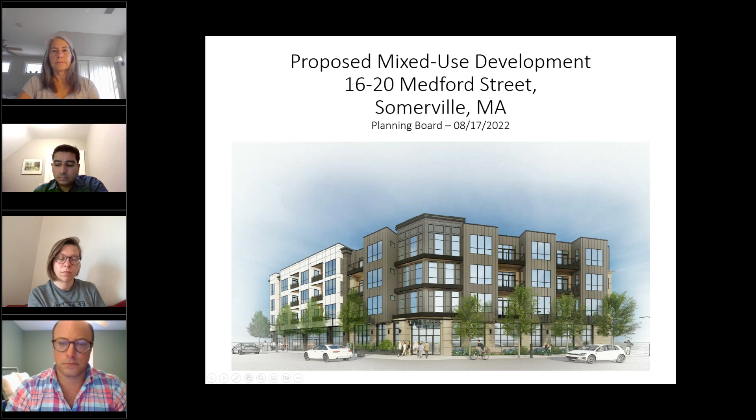Just a reminder of the project team, which you're all pretty familiar with at this time. DiBiase Homes as the owner, Nick Zazula from MQM as the legal counsel, and Khalsa Design as the architect. We also have GM2 as the traffic civil engineer, and Verdant as the landscape architect.

And our development timeline, we were here just two weeks ago for our second planning board meeting. And prior to that, we went through the whole process with the UDC and neighborhood meetings for a little over a year now.

And a quick recap of our site. So we are at the site indicated here at the corner of Medford and South Street. We also front on Bedford and Warren Street. Medford was our pedestrian street where we've located our commercial, and the remainder of the project would be 41 residential units.

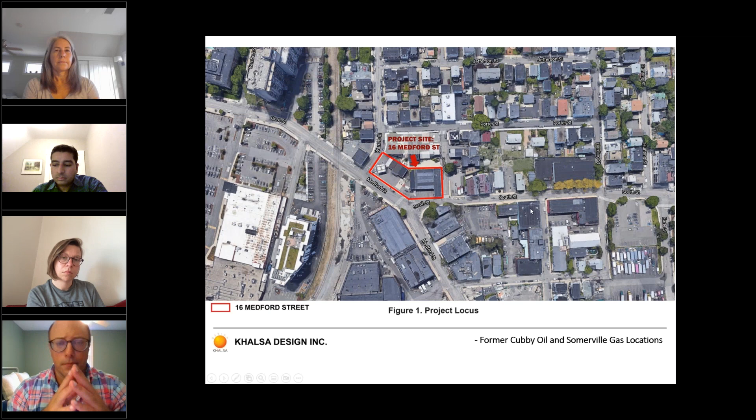And our proposed aerial view, so you can kind of see before and after, the massing of our building. And what we heard last time is you wanted to see kind of enhancement of the rear facade design, because there is some visibility from Warren and Bedford. We've provided some additional views, which can really give a picture of how much you'll see, along with enhancing the detailing on the facade.

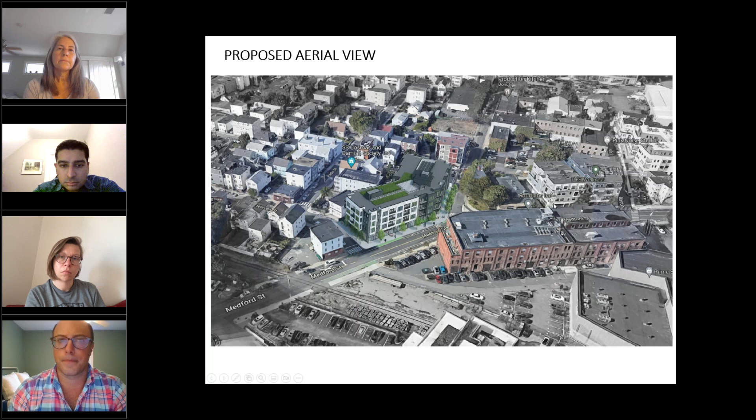So here was our previous rendition of the rear facade. We had kind of more of a simple look with just gray panels with some balconies in between for the entire length.

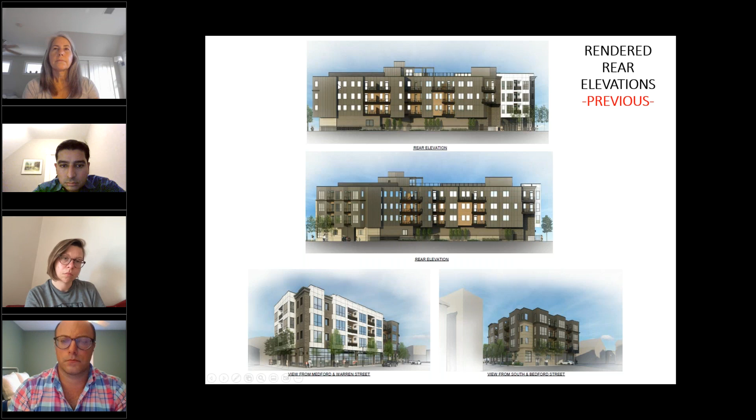And our proposal today, which we revised, is showing the treatment that we used on the Medford and Warren Street side, which had the white paneling bays carried around for that entire side of the rear till you get to kind of the pinch point. And with that, we believe it is a more cohesive look to the building.

We've also changed the window pattern to give more interest to that facade versus just having a bunch of double windows. We've spaced them, given some trim work around them. We've incorporated some additional cedar siding areas to warm up the space.

This slide shows our revised rendering. The top view hasn't changed, that's the corner of Medford and Warren, but we've added these two additional views to give some context. So this top right one would be if you're on Warren looking towards Medford Street. So there's a two-story existing house here.

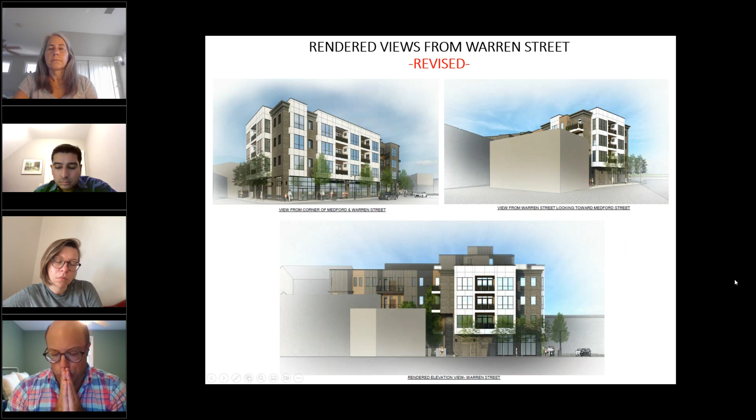And from Bedford Street, we did the same thing. So the same treatment would be carried around that side. You can see in these bottom two views are perspective views of what you'll see. The adjacent house is a 2.5 story, and there is a double wide driveway, so you will see a good portion of that facade. We have, just like I said, carried the same treatment from the front around to that side and broken up with further cedar siding.

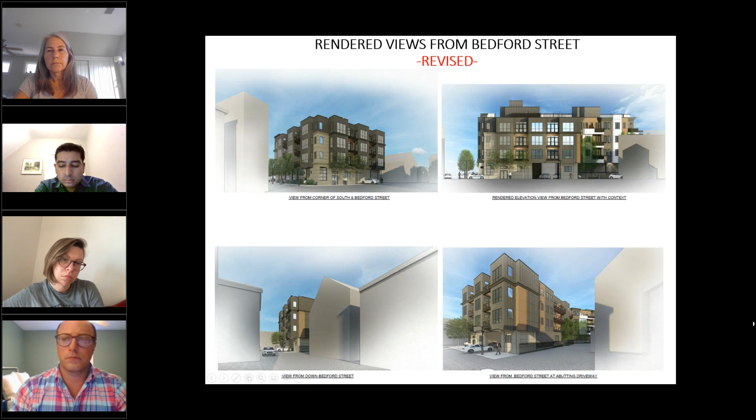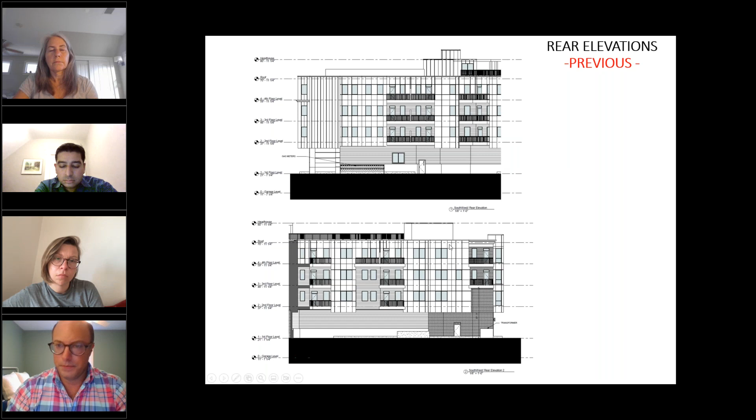And just the line work drawings showing the before, which is the panels and different window spacings, that got a little bit plain for the back. And then we've dressed it up with, especially this bottom one, you can see where we carried the Medford Street treatment around with the white panels, the balconies, and then spacing the windows differently as well.

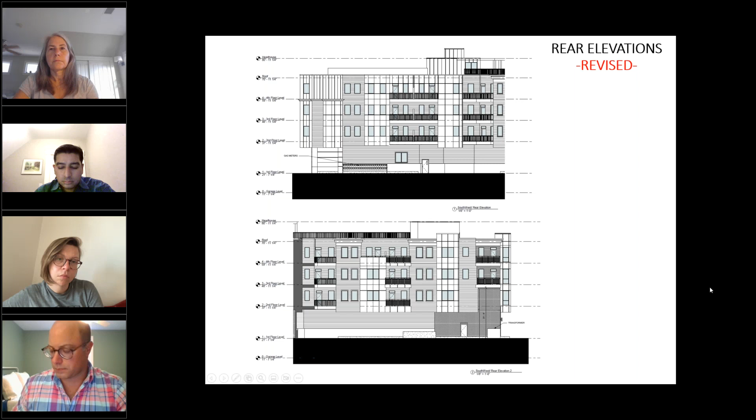The gist of all those discussions over the past months was that burying the overhead wires along the street frontage was infeasible for a few different reasons, mainly cost. It was estimated at a couple million dollars for the block of wires. We also discussed with the director of engineering, who basically said they don't have much experience with this amount of burying overhead lines.

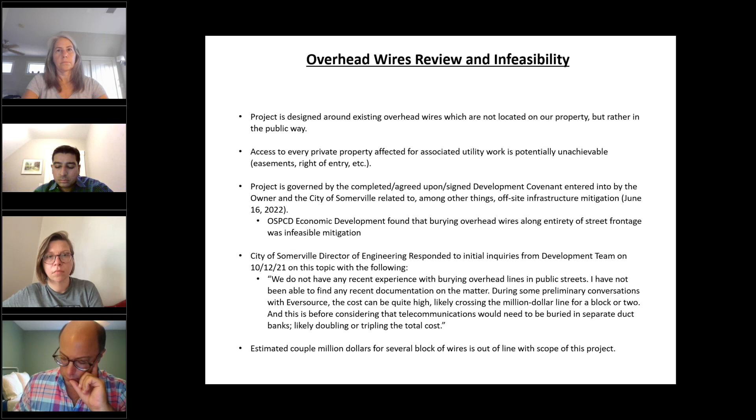This came up from the neighborhood and in discussions with Councilor J.T. Scott, our city councilor. At the end of the day, it's just not something we're able to do for feasibility reasons—not only economically, but also from a time and coordination perspective.

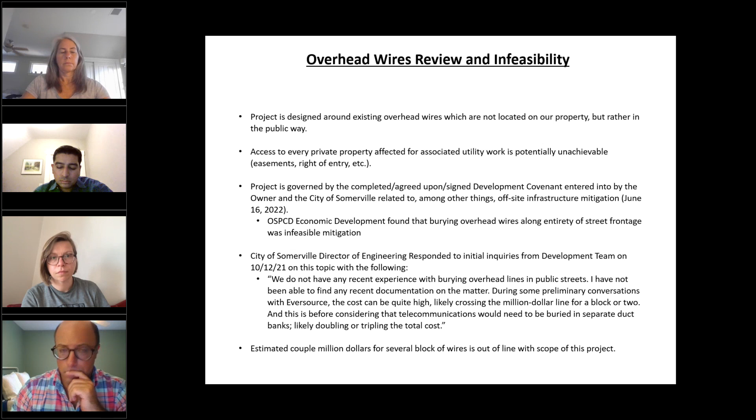Happy to go over this in more detail and answer any specific questions, but we wanted to make sure we addressed the question since it came up throughout the process. We looked into it extensively, with discussions with the city and Eversource. Those were the two main points we wanted to hit, but we're happy to go into more detail on any of those or any other questions you may have.

Thank you very much. I'm going to reserve my comments until I hear from my colleagues. This is not new information as it pertains to reopening public testimony, so we won't be reopening public testimony, but we will continue the discussion between the planning board and the applicant and staff. I would appreciate hearing from my colleagues.

I have a few comments, but I'd like to hear what folks say. My concerns were not absolutely critical to the building, but I do respect that you have made steps to address the concerns I raised that were aesthetic.

Yes, Aaron, please. Thank you, Mr. Chair. I'm going to respond to the power line bit — I really appreciate the applicant's diligence in looking into that and studying the feasibility, just trying to make it happen to the best of your ability. I also appreciate that the utilities for this building will be buried, and that should conditions in the future change regarding right of way, easements, and those externalities in city or Eversource control, it doesn't limit the feasibility of burying power lines in more densely occupied areas. So I appreciate the detail and the challenges here, and thank you for reporting back on what you've done. I don't have concerns there, but I appreciate the applicant's efforts.

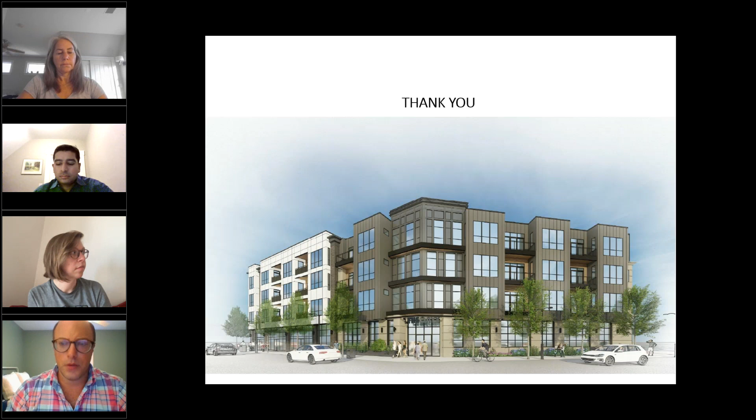The concerns that were raised by this board and by me were that the original design really didn't respect the rear of the building, particularly because we had people that would be looking at it. I think what you've done, if we look at the bottom rendering, really does add some distinction to different parts of the building.

I think it shows some variety of material, some variety of where the windows are and where the trees show up. I think it really does reflect an attempt by the applicant to respond to the concerns we raised in the last meeting. And I think this is a huge step in the direction we're looking to see in the revised rendering of what this side of the building would look like.

So I appreciate the work that you did, both to address Aaron's questions on electrical, but also on the concern I raised on the side of the building. So I'm pretty satisfied with what you've presented with us tonight. I don't know if anybody else has any comments they'd like to raise before we move to the next stage of taking a vote on this application.

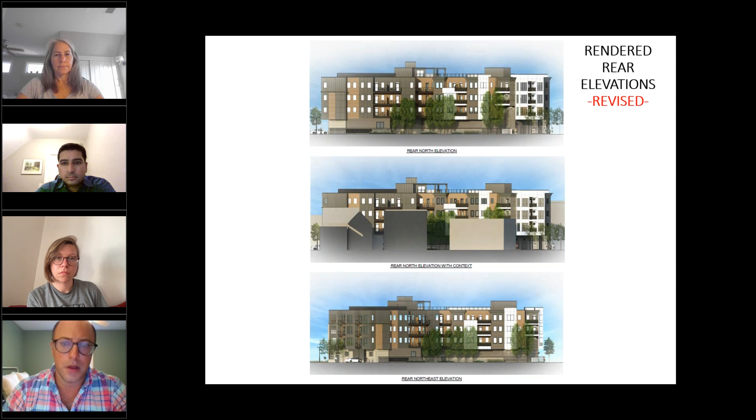Following public testimony, review of the submitted materials and deliberation of the required considerations outlined by the zoning ordinance, I move to approve with the conditions laid out in the staff memorandum the site plan approval to develop a 4-story LEED Platinum general building in the mid-rise 4 zoning district, seconded by Aaron.

Chair votes aye. Jahan votes aye. Aaron votes aye. Debbie votes aye.

And following public testimony, review of the submitted materials and deliberation of the required considerations outlined by the ordinance, I move to approve of the conditions outlined in the staff memorandum, the special permit for a household living principal use for 41 dwelling units, seconded by Jahan.

Chair votes aye. Jahan votes aye. Aaron votes aye. Debbie votes aye.

Wonderful. We have a unanimous vote on both of the required votes by the planning board. Congratulations to the applicant and good luck.

Thank you very, very much. Have a great night. Thank you. Thank you, you as well.

What I'd like to do now is open up the applicant for 231 to 249 Elm Street and 6 to 8 and number 12 Grove Street, all of which are one application.

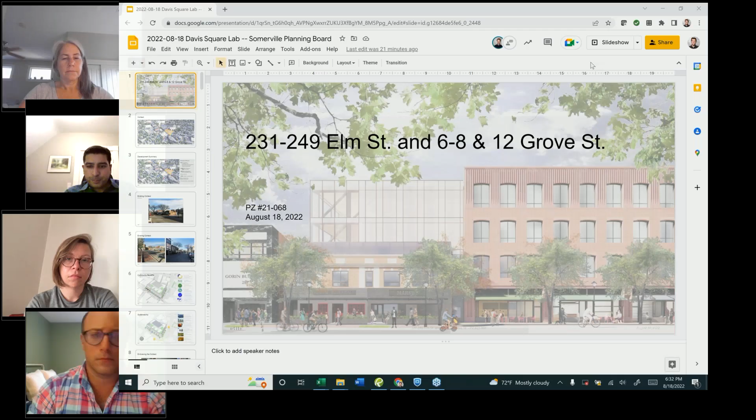Great, thank you very much, Risa, and thank you very much to the planning board for inviting us back this evening. We're very grateful for the opportunity to have a discussion two weeks ago, and we look forward to continuing that discussion this evening. What I was going to do was ask Brett to give a high-level refresher overview of the project. We certainly could go through more detail if it would be helpful for the board, but we'll take your direction on that, and we have all of the detail on hand to the extent it's helpful over the course of the discussion.

All right, good evening. Thanks, Andrew. Thank you to the board for your time tonight. My name is Brett Bentson, I'm a principal at Utile. We're a Boston-based architecture and urban design firm with offices on Kingston Street in downtown Boston. Thank you all for your time tonight.

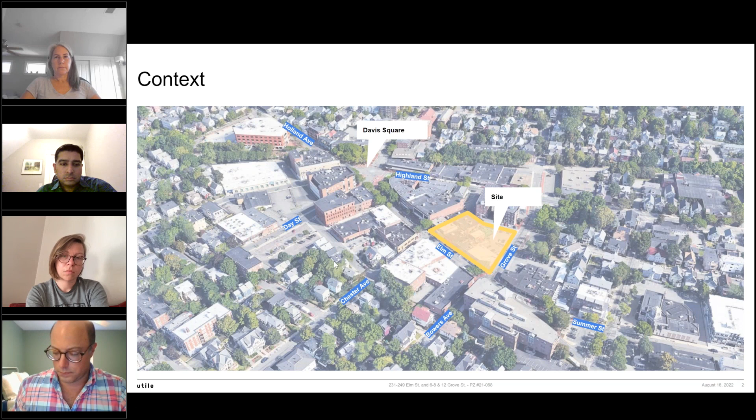So just as a quick review, and then I'm going to pause: the building is 4 stories tall with ground floor retail and lab or office space on the upper floors. It's approximately 128,000 square feet in all. It includes public underground car parking and bike parking for tenants and the public. The project will be LEED Platinum certifiable and is fully zoning compliant, including the mechanical penthouse and small scale retail amendments. So I will pause right there, Mr. Chair, and you can let me know if you want me to go through the rest of the presentation or if it'd be better to be respectful of your time to pause and hear any comments you have.

Because we did have a pretty fulsome presentation at our last meeting, and we had public testimony presented orally, and we also left the written comment period open until last Friday, I'm not certain that any further presentation, unless something has changed, needs to continue for the refreshment of the recollection of the members of the board. Unless something has changed, it's my understanding that we're not being provided new information, so this isn't going to reopen public testimony. I do want to let the board know, and Risa can correct me if my information is outdated as of a few hours ago, that there was supposed to be, or there is in process, a covenant with the city that I do not believe has yet been executed.

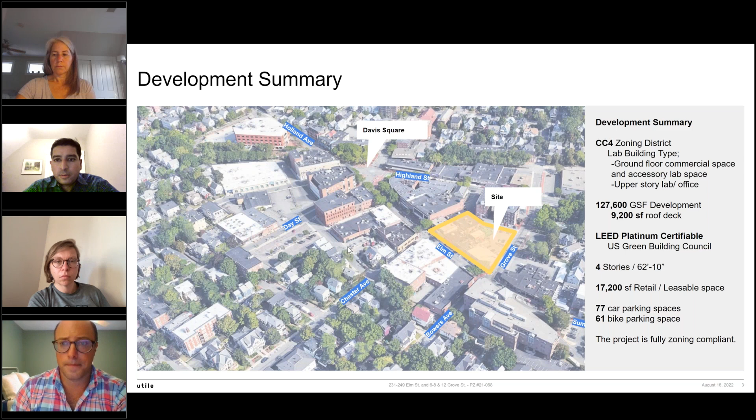This is Brett Bentson from UTL. I'm going to scroll quickly through the presentation to get to the ground floor plan so I can address the question about pedestrian and bicycle activation on Grove Street.

I know Brett will give a more eloquent answer, but I'll say, John, it's great you brought the point up. It's something we've endeavored to balance carefully - the activation but not overactivation of Grove Street. As we worked through this process, the feedback was that the Elm Street frontage should be vibrant and active with the retailers we discussed. But as you turn the corner, there's an opportunity to enhance the condition along Grove Street versus its existing conditions, but not overdo it as you get closer to the residential node on that back side. So it's something we've endeavored to make enhanced and activated, but not overactivated. Brett can walk through the details, but we're always open-minded on enhancements.

Yeah, that puts it well. We've heard consistently in public meetings that neighbors didn't want it overactivated on Grove Street in terms of the uses on the ground floor - looking for something a bit quieter. In terms of the sidewalk and public realm, though, we think it's one of the greatest transformations for the project. The current Grove Street is in pretty bad disrepair, not a great place to experience - there's a surface parking lot behind the existing buildings and the sidewalks are in disrepair. In this plan, we've set the building back 9 feet from the property line, resulting in an almost 16-foot wide sidewalk along Grove Street, with permeable pavers along the street edge, new street trees, bicycle parking, an ample accessible walkway along the building, and potential street furniture and planters to make that public realm feel inviting and neighborhood friendly. I hope that answers your question.

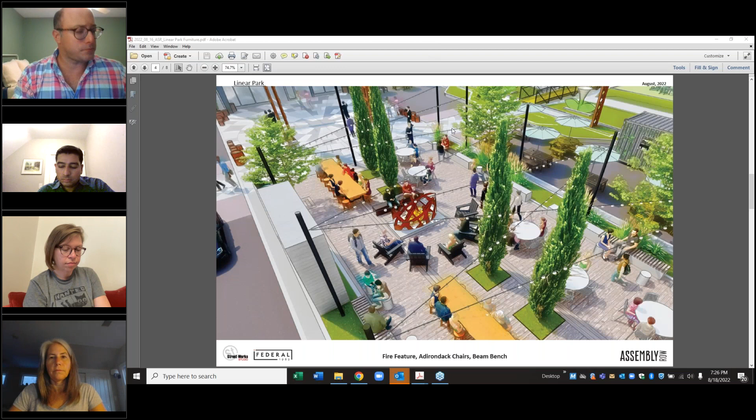So can you all see the rendering? Can you hear me? Yes, we can see you and hear you. You can see the rendering? Yes we can. Okay, thank you very much, Mr. Chairman and members of the board, and thank you for having us tonight. We are always trying to figure out how to improve things at Assembly Row. As part of that, we are trying to figure out how to make this linear park area between the smoke shop, barbecue shop, and Cafe Nero more inviting, more accessible for more people.

We initially started with a pair of bocce courts here when this first opened about 5 years ago, and frankly, they've been underutilized and not that successful. They're not regulation-sized courts, they don't get much use, and we would really like to do something to make this space more inviting and welcoming for more people.

So our thought is to replace the bocce courts with a public fire feature and really increase the amount of furnishings, different types of seating options available to people here. We thought the fire feature is something that could really be used year round. Right now, the bocce courts get covered up in the winter, and the space just isn't as active as we'd like it to be. So the proposed fire feature is right here in the center of the rendering. The area where the bocce courts are today is outlined in a rectangular frame in the decking underneath these columnar trees and the fire feature.

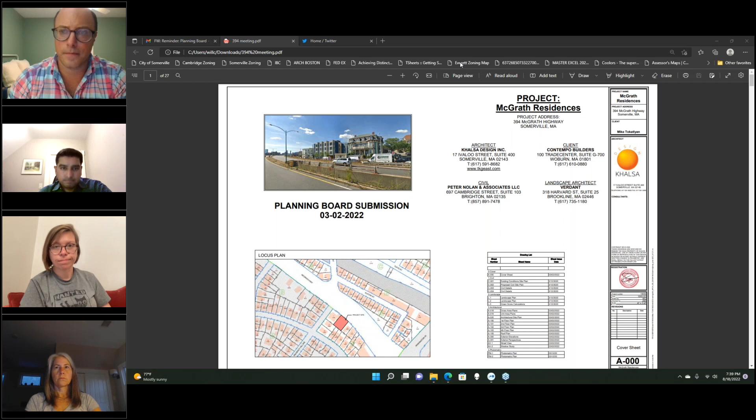Thank you, Ann. Can everyone hear me? Because I have a new web. Okay, great. Thank you. Good evening. Good evening, Will Chalfant from Khalsa Design. Nice to see all of you again.

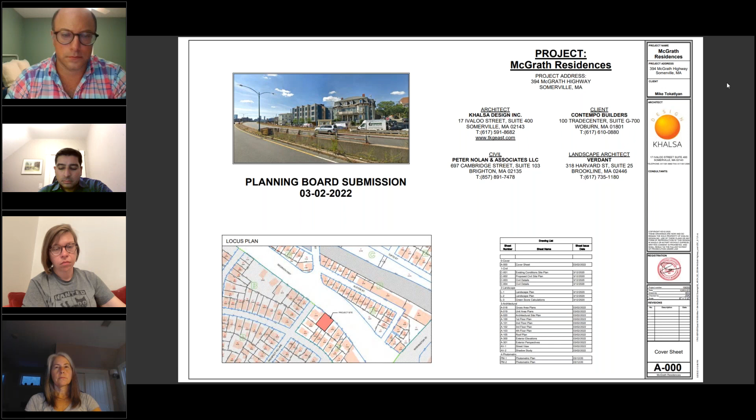As Ann mentioned, this is a proposed multifamily residential project on McGrath. We're kind of at the base of, halfway up and at the same time at the base of Prospect Hill, so it's a unique situation. This is currently the Excel Mechanical site. The building is literally built into the earth almost here. It takes up basically the entire site, so there's not a lot of breathing room from that road right now.

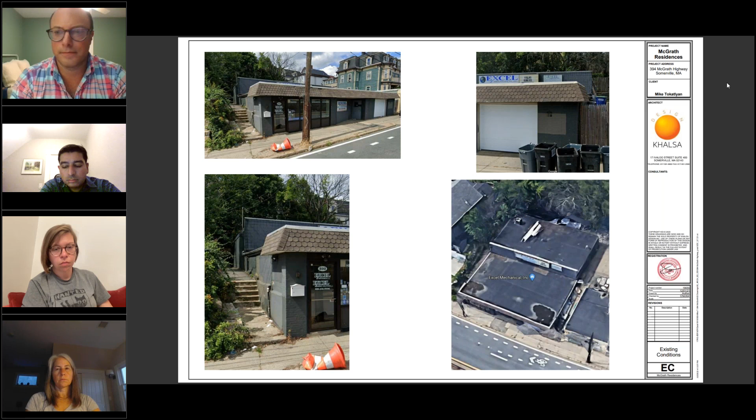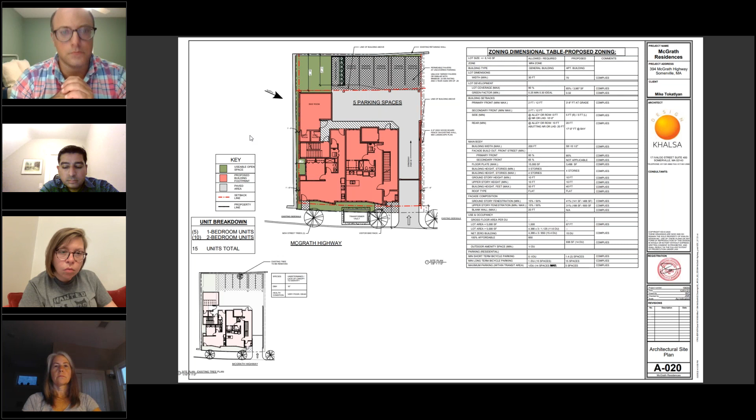So again, 15 dwelling - oh, I'm sorry, hang on one second. Gosh.

I apologize, I have a new mouse, we'll leave it at that. You're also way better at sharing your screen than I am. Well, baby steps for me.

I don't know what happened there. Apologize.

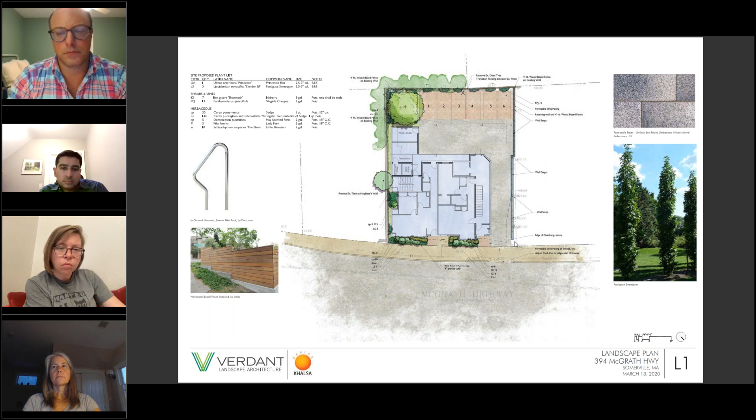We meet our green score requirements. Obviously that is difficult to do with the amount of open space here at grade level. We achieved that up above. I'll get to that shortly.

If you like, I can go through the zoning elements of this, but this simply outlines the fenestration requirements that the city has for buildings in the MR zone. So we're compliant in that respect.

We have a diagram here outlining our proximity to our existing abutters. We want to be cognizant of that because obviously this is a very unique spot in Somerville as far as its view corridors to the city. So we did meet with neighbors, work through some perspectives to outline whose view was going to be affected, and if it was. Actually this site is somewhat situated down enough where we're really not affecting views of anyone that spoke up. I will say that we spoke to everyone.

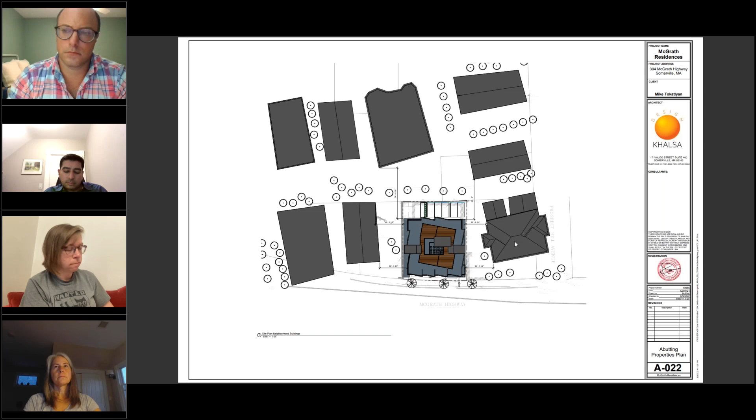Just a quick summary of the ground floor. Again, 2 units, a small lobby space. It's served by 2 stairwells and an elevator. We've got our bike room in the rear and our trash enclosed in a horizontal cedar fence.

Up above, 5 units per floor. These are small sort of efficiency type units. 2-beds are only, well, I don't want to say only, but around 830 square feet, while most of the 1-beds are 500. So these are probably not family style units, more young urban professionals or empty nesters.

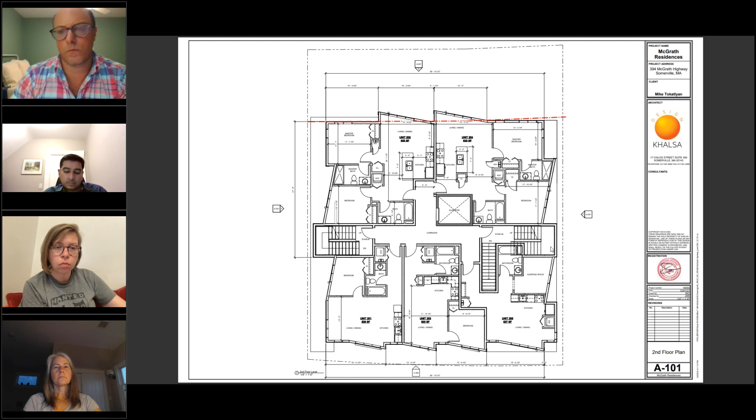Again, floors 2, 3, and 4 basically stack on top of each other. And then we get to the common roof deck, which is split up amongst public and a couple of private decks. So I think while this image is attractive, I'd like to go to the landscape plan, which kind of really exemplifies what we're trying to do up here, because of where we are and our proximity to the road and adjacent buildings, and frankly McGrath Highway, we want to make the oasis up on top.

So we're really trying to, and this is how we're achieving our green score requirements, make this a lush space where all tenants can take advantage of it, with different views looking in both directions here.

We've got this deck and this deck which are private to the units directly below them, while these two will be public. And the whole building, this is serviced by the elevator as well, so all residents will be able to get up there.

Additionally, it's allowing us to really screen all the mechanical equipment by grouping it. We're going to be raising that slightly and shielding it so that it's condensed. Yes, no pun intended there with the condensers.

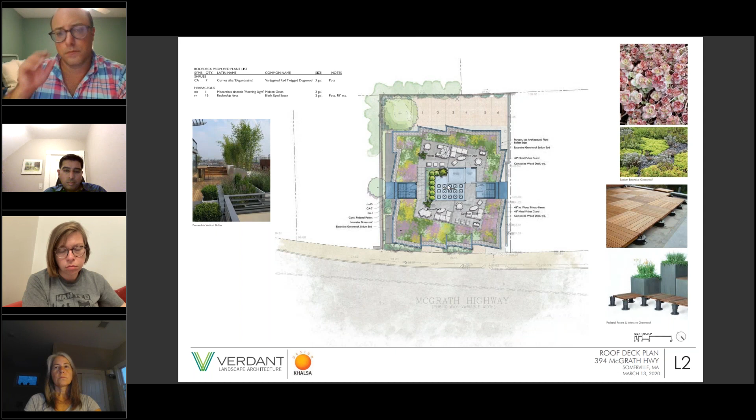So... mouse. I'm teasing everyone, I apologize with the next slide.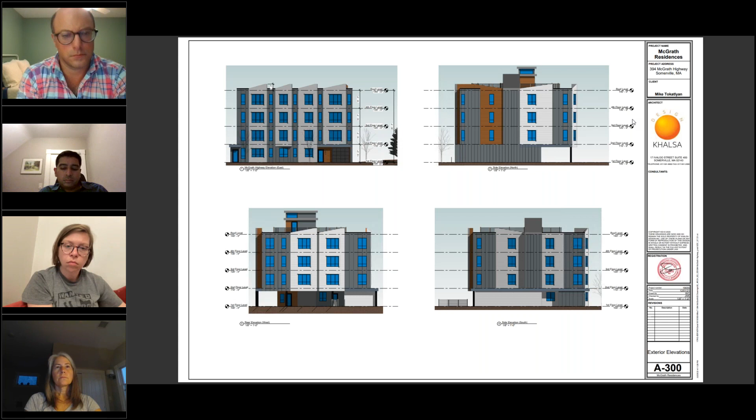By the way, we've made the floor plan sort of unfurl towards the city with these bays that are angled to take advantage of this view corridor, and also shield our windows from the direct abutters. We placed windows in a position so that they were not looking directly into the abutters that were close, but more importantly, this would frame these views above McGrath Highway into the great views beyond.

So again, standing seam, we've got these cedar accents.

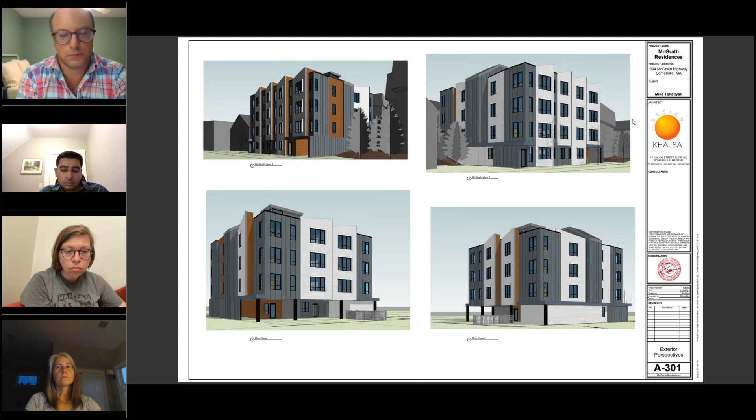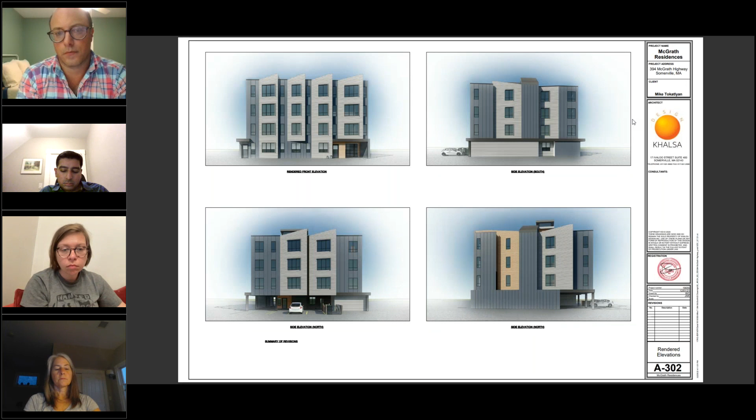So as you come down McGrath, the building almost opens up to you, sort of like sails on a boat. It's a little bit different, but it's still respectful of an architectural language that the city and residents are familiar with, but it's a little bit of a modern take on it. We've got some more rendered elevations here, outlining how it looks, and this is a rendering showing how this would look with the current day McGrath.

So it's a bit of a contrast to the traditional Mansard next door, which is a beautiful building, but it also transitions down into what's going on in Union Square as you take the right onto Washington and then get into Union itself. So we think it's very fitting for the area. It's going to be a nice addition to what has been a bit of an industrial wasteland for a little bit, and that's not meant against anyone there. It's pedestrian unfriendly, and I think adding more residences here will hopefully change that a little bit.

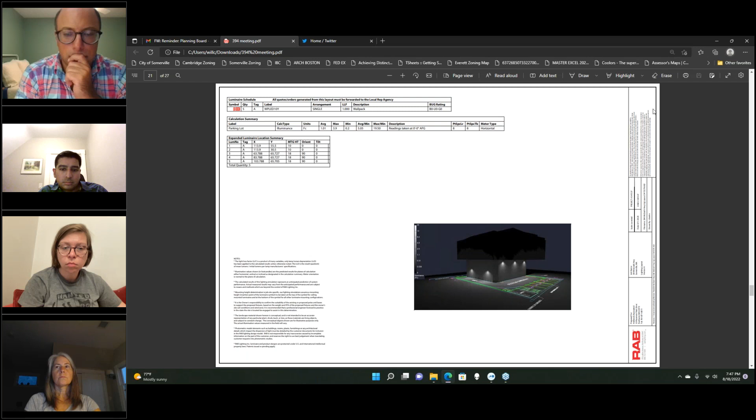So I do have more sheets here related to shadow studies that we've done, photometric plans, et cetera, civil, but I think at this time I'll turn it over to the board and leave it up to you for questions.

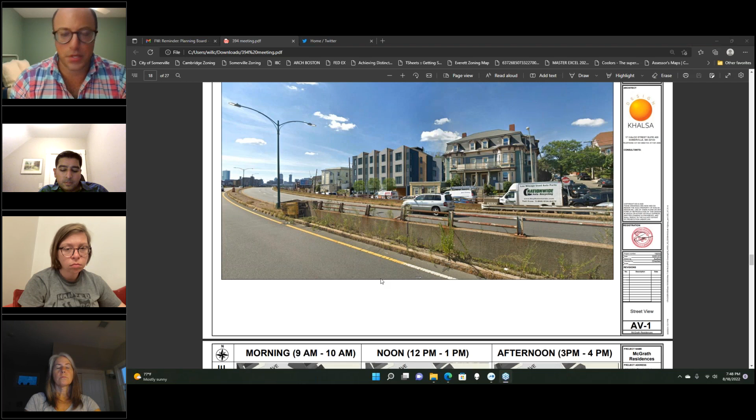Thank you very much. I appreciate the presentation that you made. I'm going to have a couple of questions and comments in a few minutes, but I would appreciate the thoughts of my colleagues first.

And because this is a public hearing, I would actually like to hear the thoughts of anybody in the public that wants to speak before I do, because I do not live in this neighborhood, and I'd like to hear folks' thoughts on the application. So if anybody on the board has any comments or questions for the applicant or staff at this time, I would certainly welcome you.

Seeing none. Aaron, was that you, or is it we just, okay.

Seeing none, what I'm going to do is open it up to public testimony. I would like to open it up to anybody that wants to speak in support of the application. So if you please raise your hand, I'll call on you in the order in which I see you.

I see the hand of Matthew Brigida. I apologize if I mispronounced your name. But if that gentleman could please be unmuted, I would welcome his testimony. If you could please give your name and address for the record. This is Raisa speaking. Matthew, you have been unmuted.